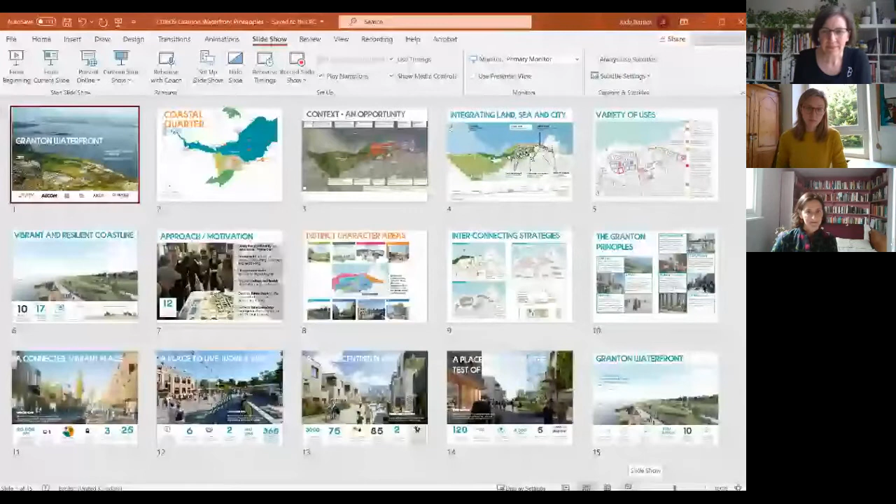I'm Jude Barber, Architect Director at Collective Architecture. And I'm Jo McCrae, Architectural Assistant at Collective Architecture. Together we led the multidisciplinary team for Granton Waterfront, working closely alongside the Dutch urbanist Julian of Studio for New Realities for the client team at the City of Edinburgh Council and partners.

And the image that you see here is the view looking across the site and the Firth of Forth towards the Forth Road Bridge and Fife.

At present, North Edinburgh, where Granton is located, just there at the centre of the map, is often considered at the edge or to the fringes of the city. However, it's actually only 3 miles from the city centre and adjacent to that incredible coastline that we saw in the picture. And as Edinburgh continues to grow and evolve, the need for an inclusive, affordable and sustainable development for all has become ever more acute.

So really, the city identified this opportunity for this area to be redeveloped and for this to become a new coastal quarter, to be at the centre of the region as part of a constellation of coastal towns within an activated bay.

So focusing in on the site and Granton itself, you can see the extent of our area outlined there in pink. And I know there's a lot on this slide, but the key things here are ultimately it comprises of around 200 hectares of open space and parkland, 50 hectares of which is contaminated, derelict industrial land with a gasometer and former station building at its heart, the kind of red portion that you see there on the map.

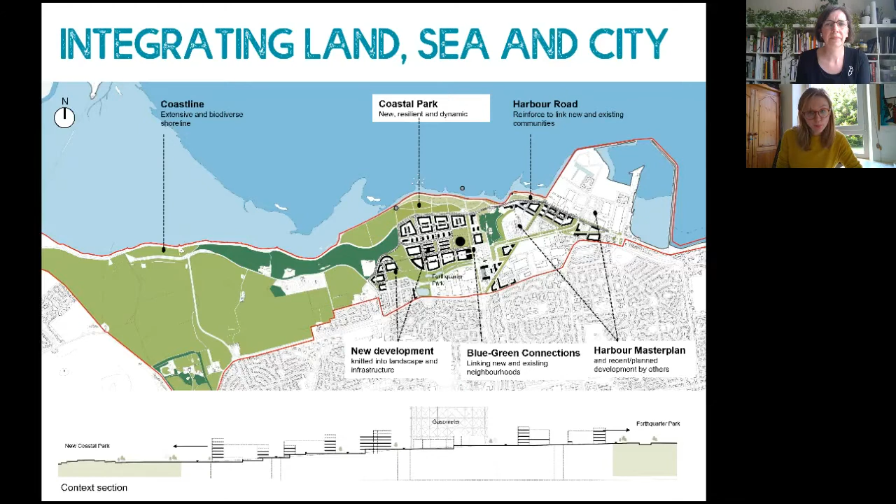Existing infrastructure is enhanced with blue-green connections formed between new and existing communities. Development also includes a new school, cultural facilities and commercial units, which are integrated and connected via human-scale streets and avenues. These are linked with active travel routes, a new tram extension, bus routes, and two new active travel hubs.

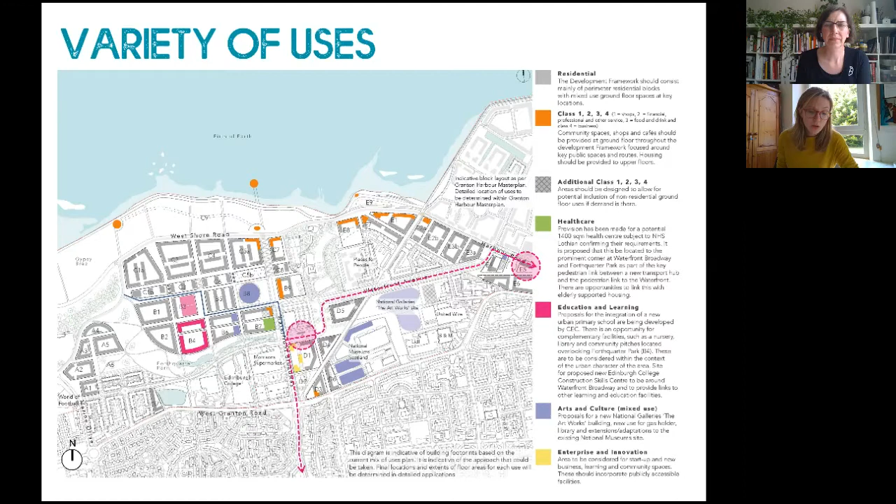At the heart of the project lies the creation of a new 10-hectare flood-resilient dynamic coastal park. This is proposed on former industrial reclaimed land that was previously inaccessible to the public. New development is purposefully set back from the water's edge, giving the coastline back to the city, nature and people. The park has been designed to be open, healthy and inclusive for all, and it maximises views, integrates flood resilience and enhances biodiversity.

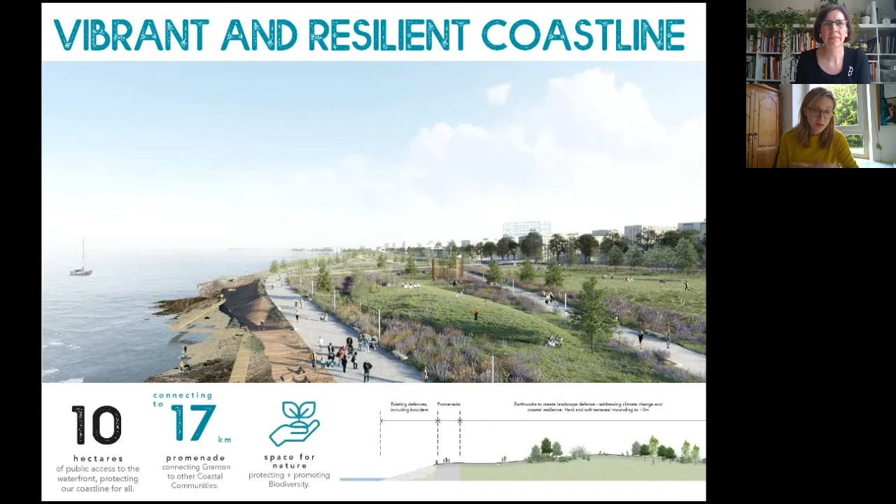The process of developing the approach to Granton Waterfront was actually almost as important as the final outcome, and this was underpinned by an engagement process that involved street workshops, stakeholder surgeries, public events and cross-party political group workshops. The key aim being that this was not to be just another master plan, but a new way of doing things.

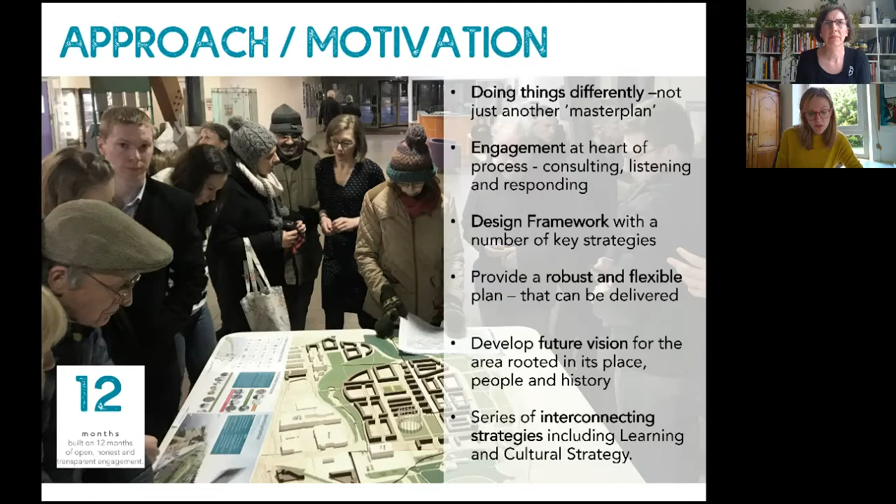Over a year-long process, everybody collectively developed a phase plan for Granton, which was founded on a robust but flexible framework. This included a series of diverse yet complementary character areas, which linked new and existing communities, shown on the screen now.

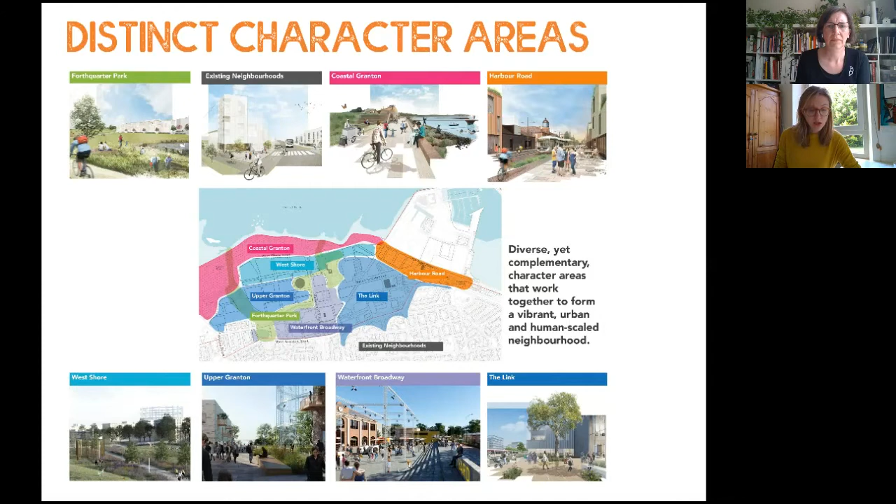The plans were not only spatial - the framework is underpinned by parallel ongoing learning and cultural strategies, existing housing renewal programmes and wider active travel proposals. The next slide shows some extracts from the development framework, showing the range of scales and detail that we're working in - from the wide-scale positioning of open spaces down to indicative street sections along key routes.

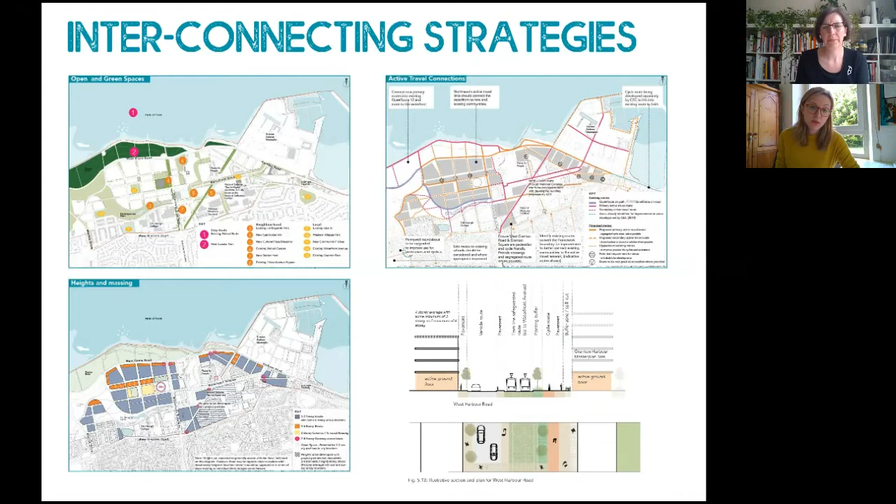From the outset, we worked as a team with the community and the client to develop a set of principles called the Granton Principles, or promises, if you like, which combine the physical, spatial, social and cultural aspects of developing place together. They set out an approach that aims to learn from past mistakes and instead provide a holistic, people-centred approach to development, embedding those principles and behaviours through every stage of the project and every person working within it, whether that's developing, working, visiting or investing over time.

In the development, there's up to 3 kilometres of new cycleways provided, connecting into the wider cycle network, and a new tram link proposed that connects to the city centre and surrounding neighbourhoods, providing a 25-minute cycle as well into the city centre from the area.

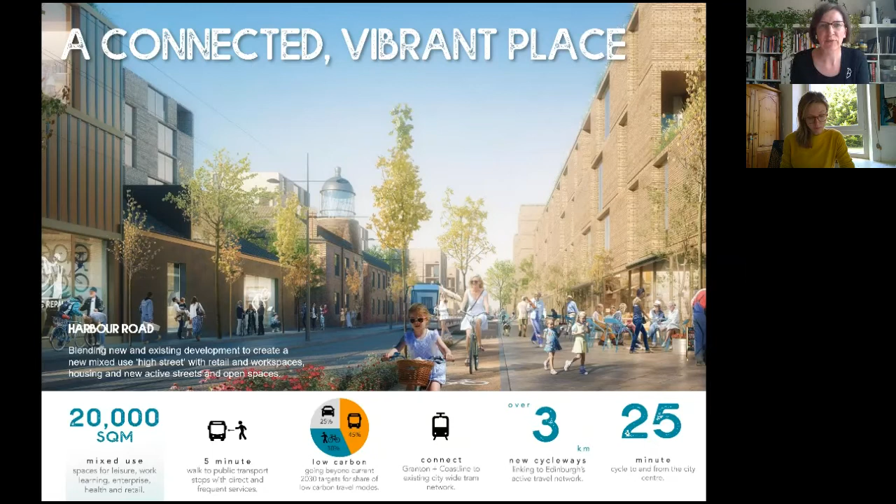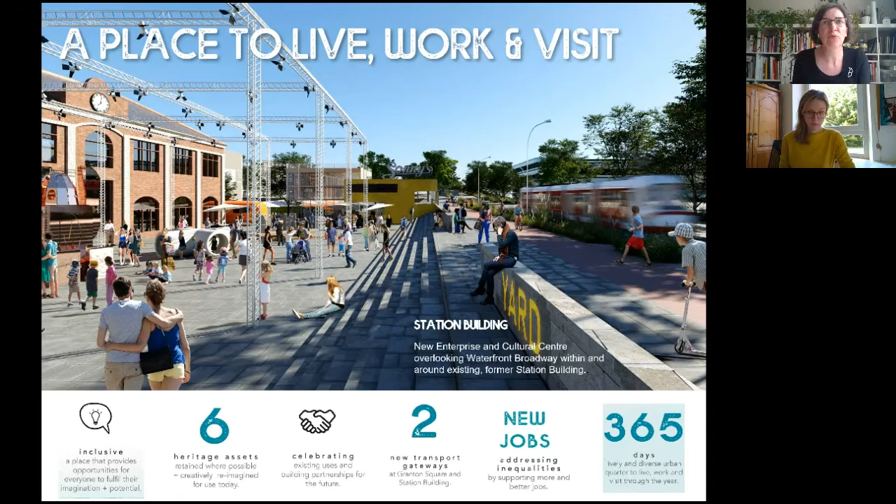This really needs to be a place to live, work and visit. This image shows the existing and historic station building to the left, which is currently being repurposed to be a new enterprise and cultural centre. It's one of 6 key heritage sites within the development framework that's reimagined through creative reuse and partnership working. It's really an example of how Granton can be somewhere where people really do want to come and stay, live and work. This site is also one of those transport gateways and active travel hubs mentioned earlier.

As we know, this framework is providing 3,000 new affordable mixed tenure low carbon homes. This image is an example of one of the neighbourhood streets in Upper and Lower Granton. These are typically and deliberately human-scaled, between 3 and 6 storeys maximum at certain points, pedestrian-focused and linked to active travel corridors, with blue infrastructure integrated within it. 75% of the homes are to be car-free, and each home is within a 2-minute walk of public green space.

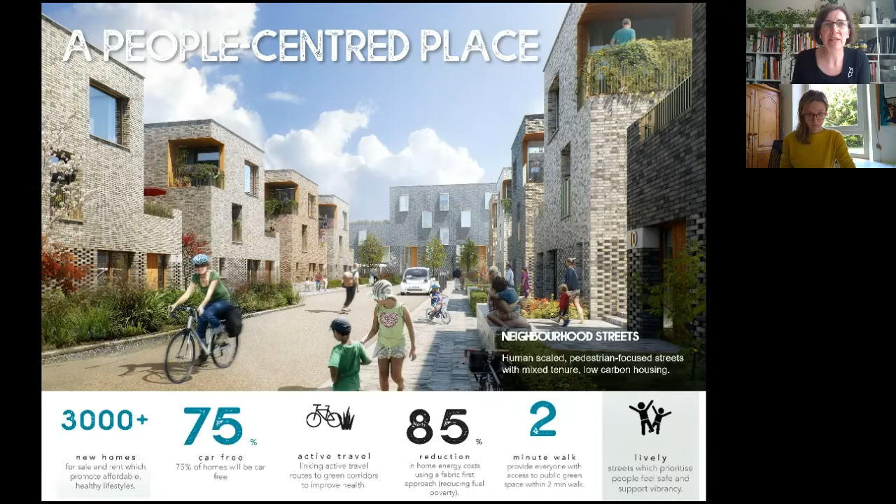And really, at the end of the day, it's creating a place that will stand the test of time. Here you can see the heart of Upper Granton with views towards the Firth of Forth along the streets and open spaces. The active ground floors host a range of civic uses, with a new school nearby and a repurposed existing gasometer at the heart of it.

You can see people using the space there off to the right. And within this, there's provision for new learning spaces developed across five public sector partnerships with a real commitment to the delivery. This is reinforced by the ongoing learning and cultural strategy that was developed for skills, opportunity and innovation in the area, which is currently lacking work and opportunity.

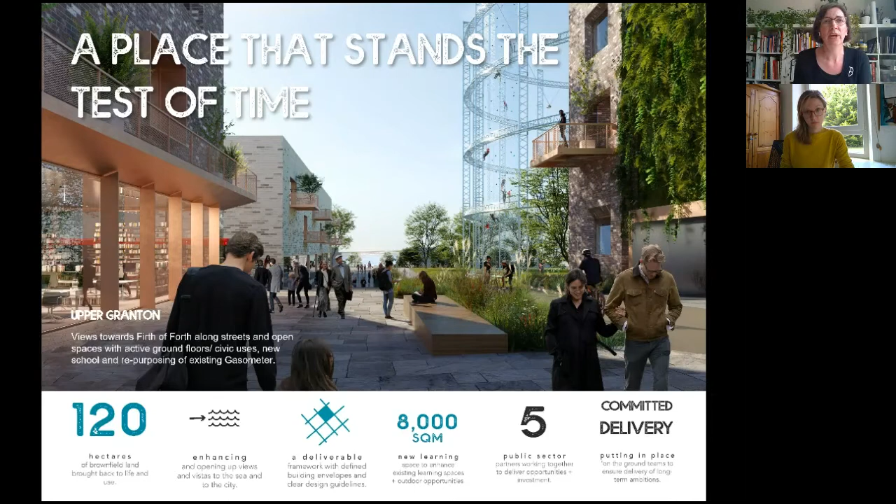And so to close, Granton Waterfront positively faces the need for climate resilience and inclusivity by taking a holistic, low carbon approach to design, development, ecology, energy and behaviour.

And already this process is underway in terms of next steps. The client's developing their financial and socio-economic plan, business case, and later in the year they'll be seeking a development partner for the next phases.

A few of the early action projects and sites that were identified are underway, such as the lighting up of the gasometer in partnership with Edinburgh College, who are based on the site. A demonstrator housing project is being developed using modern methods of construction to inform the future phases. And the Hidden Doors Festival are basing themselves here in 2021 to bring people to the area.

Sustrans is also funding new cycle routes, and the tram extension was approved to Newhaven nearby to the east of Granton just last year and will be completed in spring 2023.

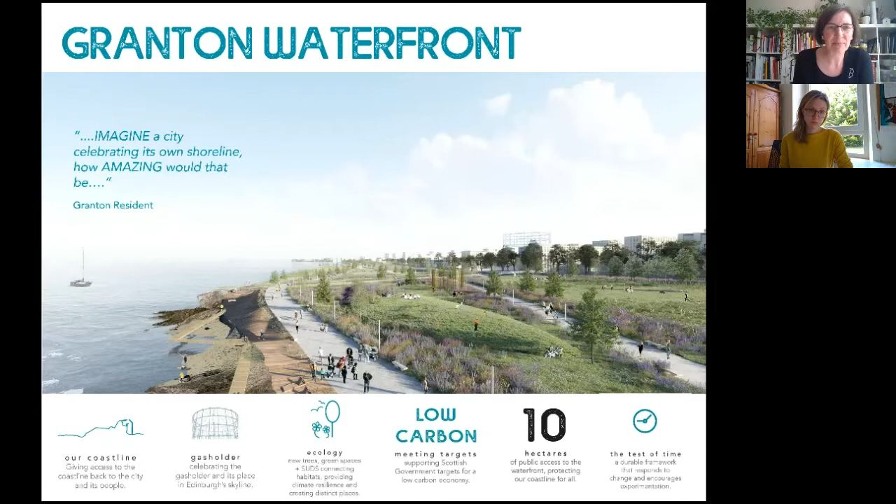So there's lots to feel positive about, and I think we love this quote which came through the consultation process from a Granton resident that just says, imagine Edinburgh celebrating its shoreline. How amazing would that be? Thank you.

Brilliant. And you were actually just on such an exact 9 minutes that I didn't even have to give you a warning. So congratulations on that.

I'm going to invite our judges to put their questions to you. So Catherine, if I could ask you to start, would you like to explore Granton? I'd love to.

Thank you so much for your submission and your presentation. I'm really struck by the integration of the different strategies and how that's being thought through, and that's a great opportunity to being led by the council. That makes it more possible.

I have a big cross-cutting question and one more specific one that you might want to relate. The big cross-cutting one is that you do talk about reducing inequalities as being key to the thinking, and I'd really like to understand more from you how you think the plan, the design, and indeed the place going forward will potentially address that. And then the specific one was about the park. Jordan, you said the park was designed to be inclusive for all. So I'd love to know what you mean by that, and I'm hoping that it's more than simply accessibility.

Yeah, shall I do the first bit, Jo? Okay. So, in terms of reducing inequalities, I think we talk about the principles there in the presentation. I think this really is, and I hope this came across, learning from the mistakes maybe of the past, which is that it can't just be about new development. It can't just be about new people, shiny things for new people. So really, one of the conversations embedded right the way through the consultation process was about how what is happening here can work with what's already there and build on that, as opposed to being a challenge to that.

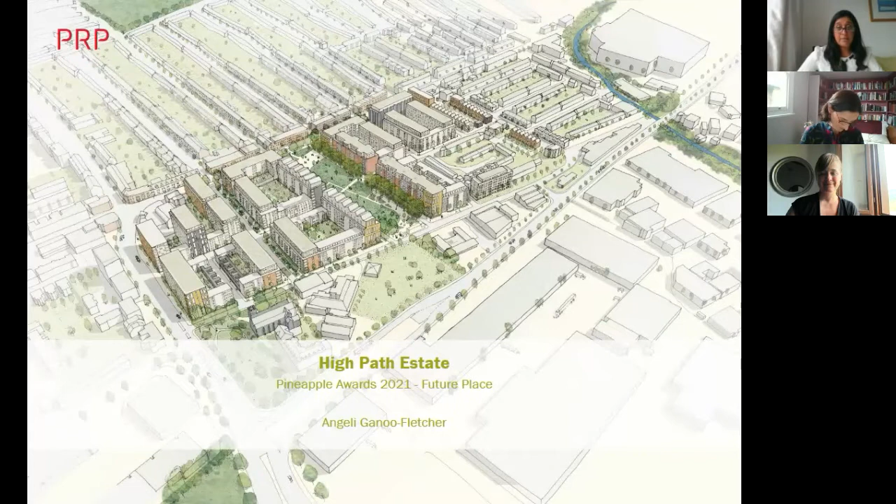Good afternoon everybody. My name is Angeli, and I'm a landscape architect, and I lead the landscape team at PRP. High Path is one of our most ambitious schemes we have been part of. Our passion as landscape architects is to deliver true places for people, and this has been the key driver in our team's approach.

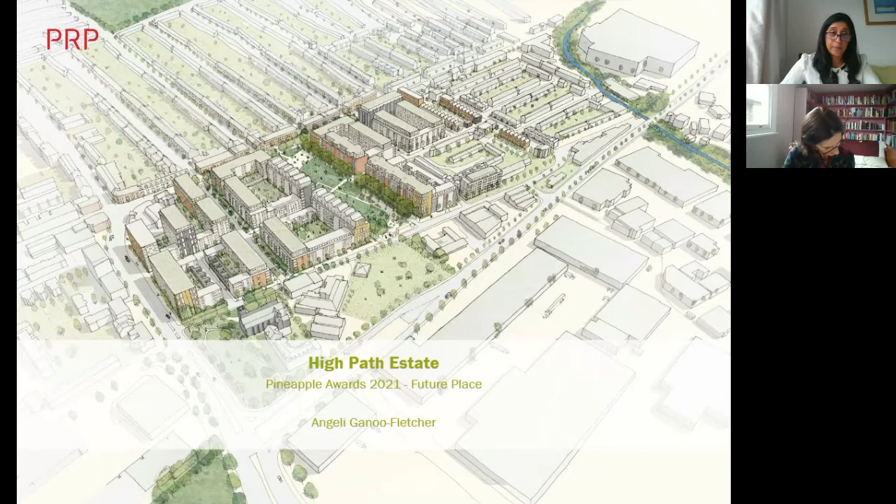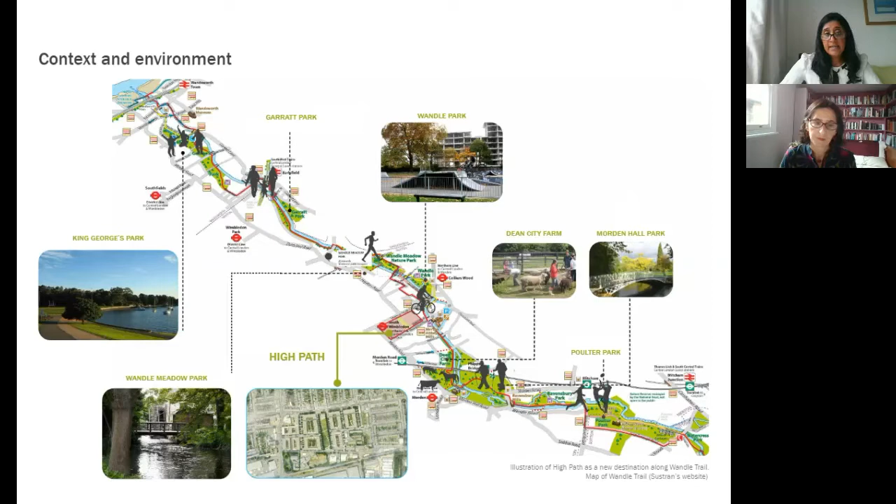The estate itself is located in South Wimbledon, near South Wimbledon Station, and it's actually a tangle of competing uses and illegible streetscape, as you can see. As such, the estate is dislocated from its surrounding neighbourhood, and it's bound on all four sides by roads and internally with an array of cul-de-sacs.

The future of a place really lies in the hands of the people who live and use it. The development of the High Path Master Plan is a unique regeneration scheme driven by the community for the community. Developed in very close collaboration with the local community and local stakeholders, via numerous types of activities, as you can see on this slide.

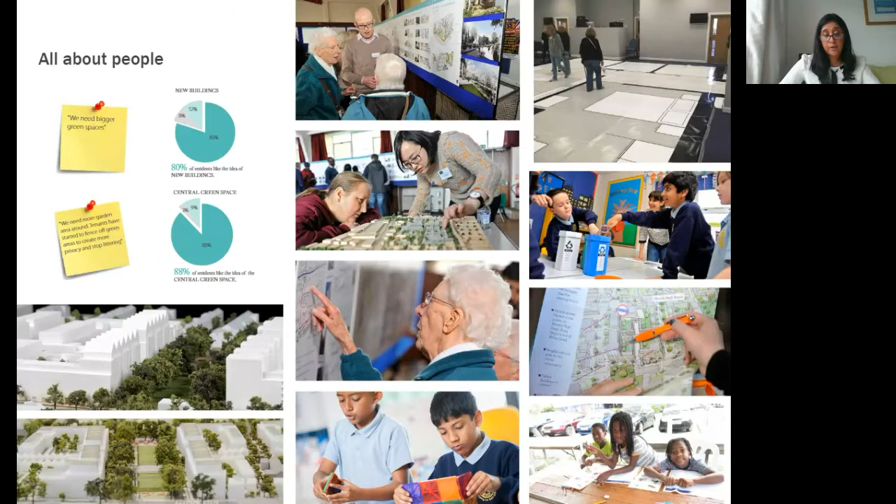The principles driving the master plan resulted in comprehensive design guidance for the whole of the estate. By setting out clear design objectives and guidance from the beginning, the design quality desired by the community is achieved. The unique opportunity here is to really integrate and reconnect the estate with its surroundings.

Reconnecting the neighbourhood into the wonderful Victorian fabric that you can see on the northern end of the estate. One of the key principles was to look at how we can drag that Victorian fabric through onto the estate. Placemaking is at the heart of the regeneration process, eradicating that 'them and us' feeling, and creating a distinct place by restoring the character and sense of place.

Rethinking the Victorian block and how this could be brought onto the master plan, and also looking at better value for High Path - not just the northern Victorian fabric, but also the eastern and western side, as well as bringing the richness of what happens in the southern end through onto the estate to really set the estate itself. And then amenity at the heart of the place, tapping into the strategic network of London green spaces along the Wandle River corridor.

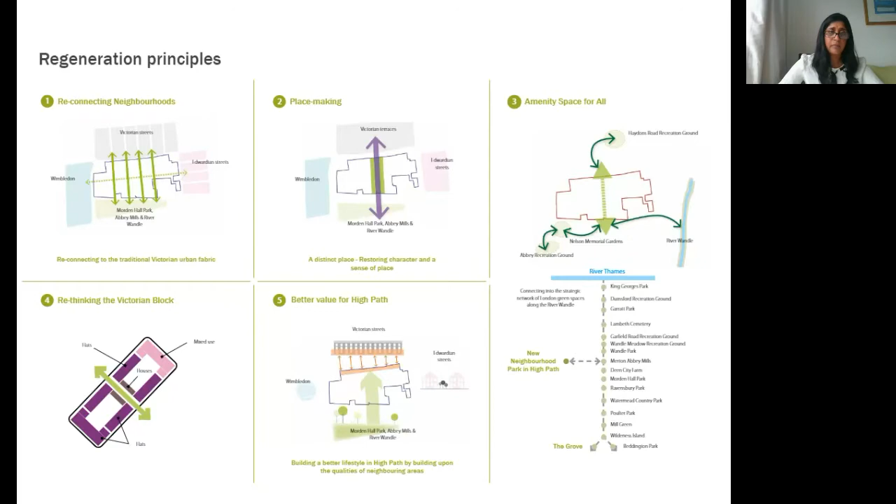Building up a vision for change by reconnecting the street is our main aim, following the patterns of the Victorian street. A permeable network of streets is created with public spaces that are well connected to the surrounding area and really accessible to all and from everywhere too, making it a safe place where people want to live, with good amenity spaces that are usable, well managed and owned.

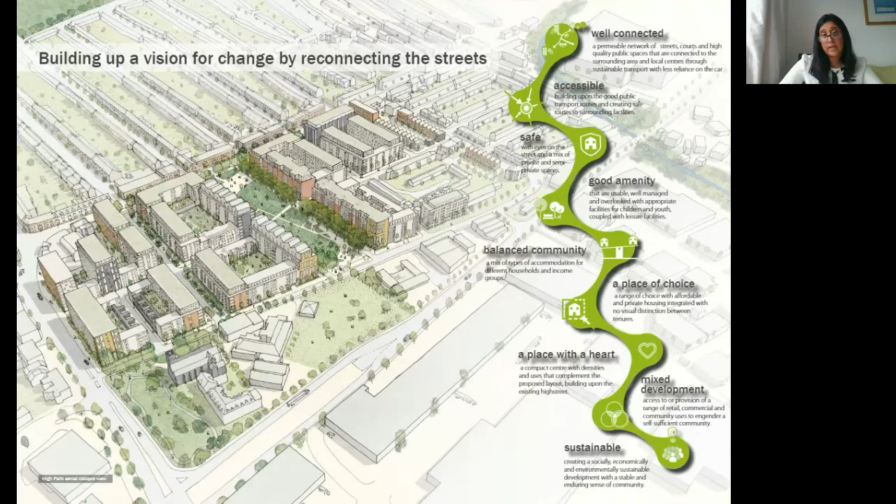And in turn, this forms a balanced community, a place of choice, a place with a heart, a sustainable community, creating a socially, economically and environmentally sound future with a stable and enduring sense of community.

Our ultimate aim was to restitch the fabric and extend that neighbourhood. The island feel of what the estate was is changed to be part of the future community. The neighbourhood park, central to the master plan, with spaces to play, exercise, sit, relax, grow our own food, is centred within this master plan, and needed to be the same footprint and size as the building block shown within that master plan, really following the principles of the size of what's happened on the other side of the Victorian fabric.

Traditional north-south streets create green corridors, and then we've got east-west inner residential streets with the retained maturity of the tree corridor along the high street.

The function of each of the spaces created has been tailored to work with who will be the users of the spaces. The landscape structure actually binds the overall master plan by grounding the landscape principles of the master plan.

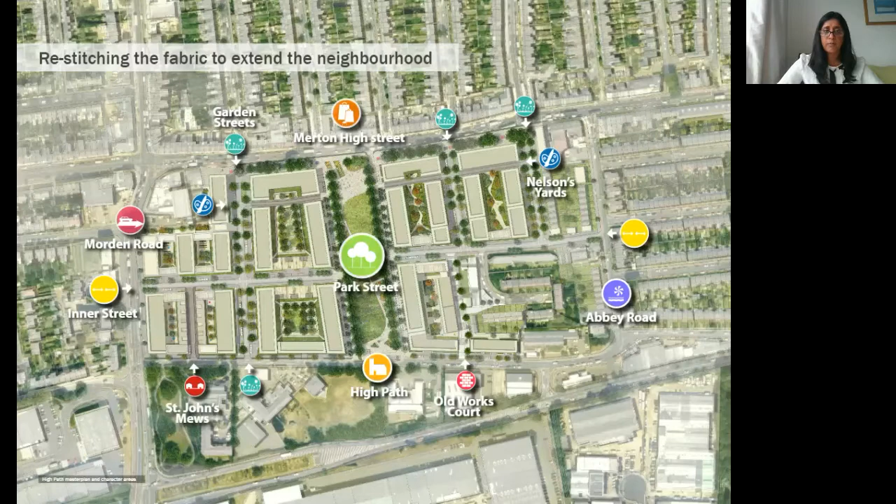The inherent relationship between streetscape and building is that factor that we really wanted to bring onto the master plan. By applying our design philosophy of contextual reintegration within the fabric with our collaborative community-led approach, the delivery of the master plan will hopefully help enhance life chances for the existing and also the new communities.

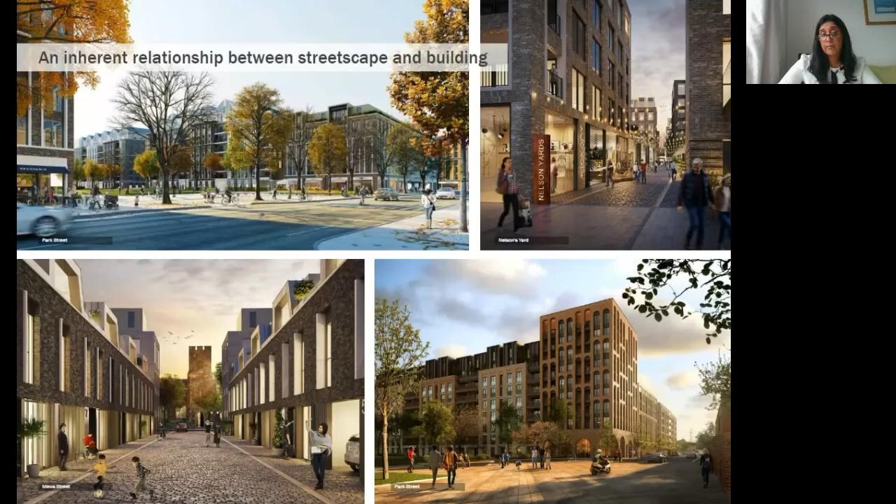The visuals shown here depict the unique interventions to the estate for the creation of safe mews streets. We've also got yards that promote activity during the day as well as during the night, and also park streets looked at with the seasonal changes that they bring.

The creation of a neighbourhood park, and not a series of estate parks, is our way of creating a park for all in Wimbledon, a place for all and a destination for all age groups, responding to the needs of the existing and future residents.

The retention of the mature London planes along the high street, as shown on our previous slide, is the landscape stepping stone into the park, and that richness is brought onto not just the park, but throughout the master plan too.

Sustainability and community has really been at the core of our design philosophy: sustainable lifestyle choices, embracing real social value, community engagement that creates legacy.